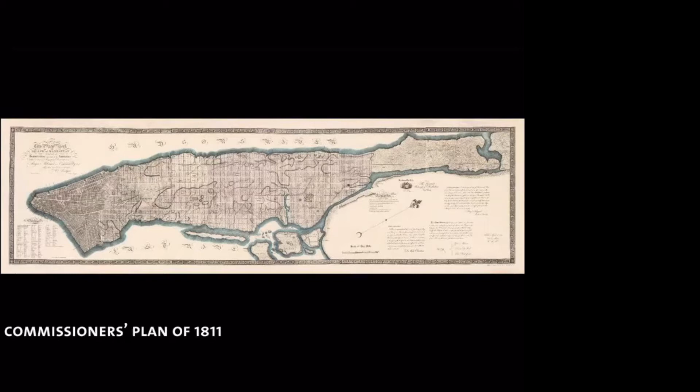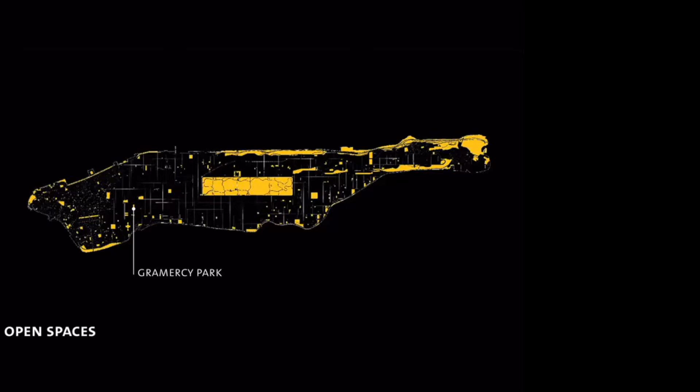Central Park naturally, but also Gramercy Park, not a small and certainly not an insignificant piece of the puzzle. I want to talk a little bit about connections, spaces that connect buildings that look across or relate through open space.

In this next map, the red bits here are connective buildings, sites where the grid of Manhattan was interrupted by an aggregation of buildings. For example, Lincoln Center, Rockefeller Center, the new World Trade Center areas.

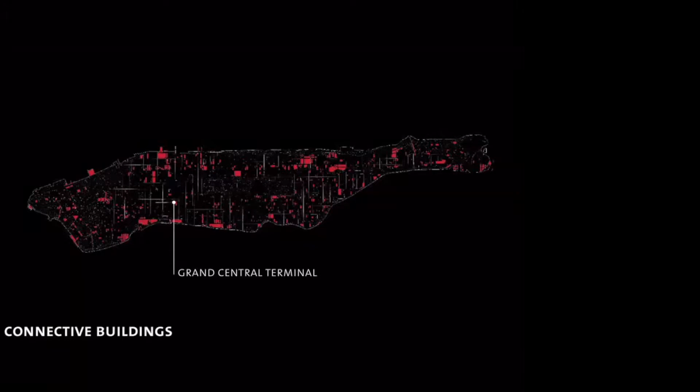These are very important incidents in grid cities, where exceptional moments for the functioning of transport, culture, and education can happen, and they enrich the grid. The Vanderbilt Tower very much relies on and takes advantage of this strategy.

Again, Gramercy Park, by omitting some throughway of Lexington Avenue, by in a way violating the grid, something great happens.

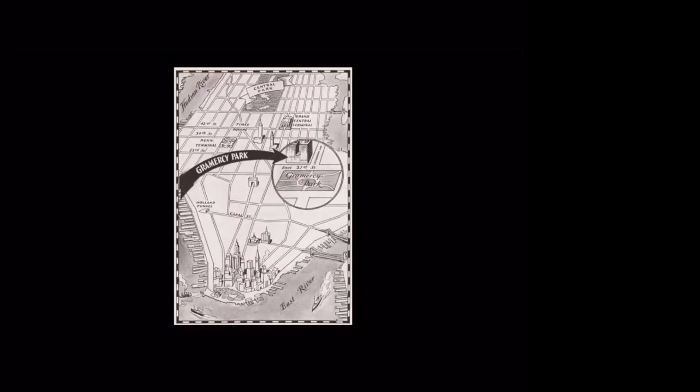The original work of Samuel Ruggles brought this idea of stakeholders from around the park to make a place. Indeed, here's where we all are, or would be if this lecture were not virtual, in the Tilden House, and we see the depiction of crowds.

So changing the grid can give us places for public and private to interplay and relate to each other, and the presence of arts clubs, not just the National Arts Club but the Players Club or Salmagundi Club, fitting for this highlighting moment in the city of Gramercy Park.

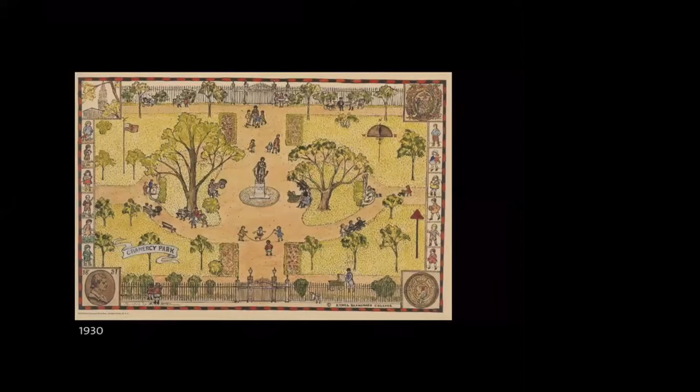A map from 1930 shows the kind of play allowed for, at least for those who had the key, with little children showing up on the side, an almost post-Victorian representation of the park.

Looking now at the map of New York on the left, we see Madison Square, and at that point the dotted rectangle to the northeast of Madison Square was a place where the first rail lines of New York City came into Manhattan, and eventually migrated up to Grand Central, where we know it sits today on 42nd Street.

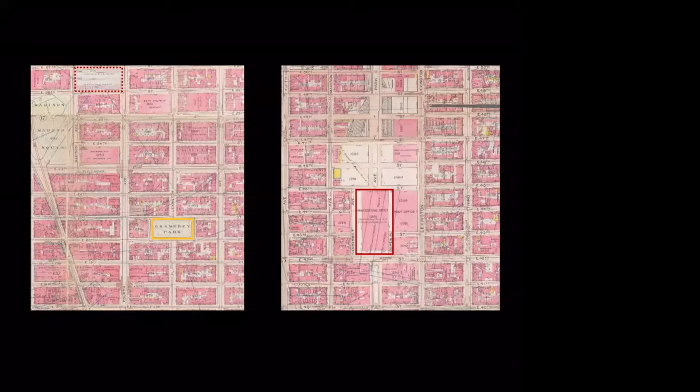So the site of One Vanderbilt, and the first Madison Square adjacent park railway corner, or railway building here, lasted 41 years.

Then came the importance of Grand Central as a place where a number of blocks were appropriated. At this stage of these two buildings, the second one lasting only a little more than 10 years, rail came in above ground. Afterwards, steam engines gave way to electric.

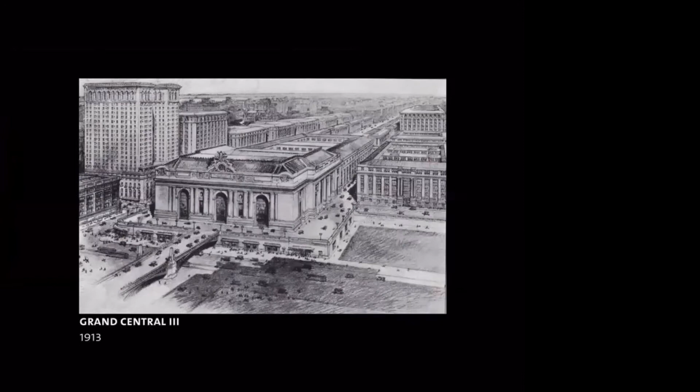They were able to be submerged, and over time this plan was hatched for Terminal City. A lot of it was not accomplished, but the Warren and Wetmore building was built in 1913.

This is really creating the premise for the site and the reason for the building, and its various extroverted features that constitute the One Vanderbilt Tower.

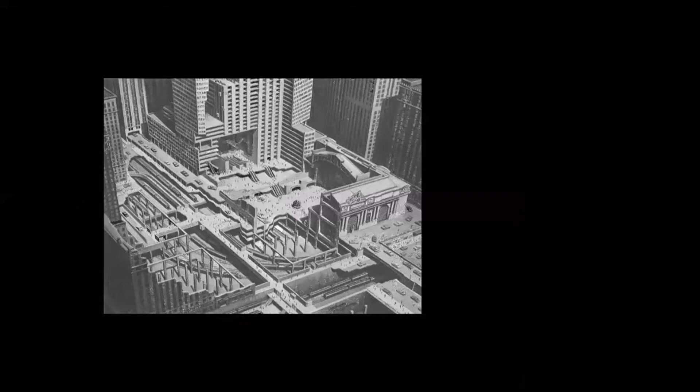Later on, as we look into the way one can dissect Grand Central, we see it as not just an operation to change the plan of this part of New York City. It's also a great sectional feat of bringing interesting vertical terracing and layering into one of the more complex buildings.

Of course, the tracks go underneath, sweeping around. Underneath, you see the curve on the right-hand side being part of the Vanderbilt site.

We think of the almost delirious imagery of Moses King in his depiction of New York as he would imagine it, a place where everything could be connected by bridge, by multi-level walkways, by tunnels, etc.

Some part of this still remains as an ambition which high-rise buildings can try to achieve. The lower Grand Central Terminal certainly did a lot to explore this possibility.

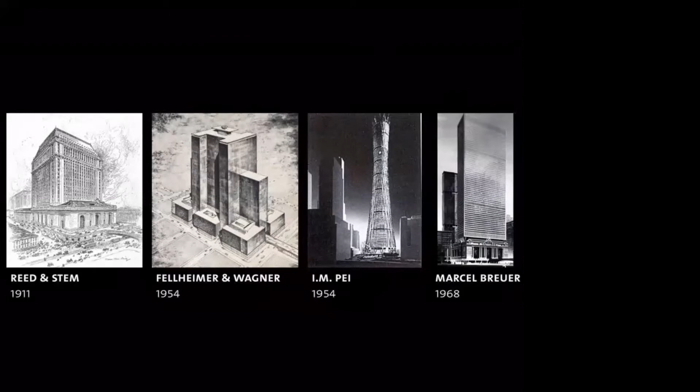After the realization of Grand Central, we've seen a number of ideas about densifying this station district right on top of the station.

Reed and Stem submitted this around 1911, at the same time as Warren and Wetmore's work. It was not taken up, nor were some of the later ideas that came decades afterwards, including very notably I.M. Pei's hyperbolic form of net cables, imagined as a super tall building on top of Grand Central.

The idea always being that density makes sense on top of a station, because the place where we can draw most New Yorkers to come in easily, conveniently, and today with a low carbon footprint, should be the place where we provide the most space for living, working, or culture.

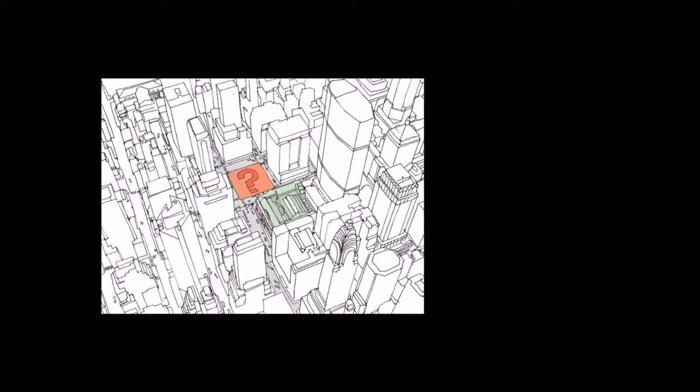But these ideas did not come to pass. So when we came to the site, about 10 years ago now, you see a question mark of an acre of land, which had been assembled by S.L. Green, who are the major landlords of much of this part of Manhattan.

I think the largest commercial owners of property at the time this was started, and close to it at this point. So the combining of a tower with a station again seems right and smart from the point of view of a sustainable approach to density. It's also, in a compositional and pictorial sense, something that reminds us of other combinations of tall and central, like St. Mark's Basilica in Venice and the Campanile, which is not such a functional building, but still a marker of space next to this, in a way the center of town.

Of course, a religious building. Actually, the Campanile fell down, I think sometime before the First World War, for I'm not sure what reason, but was resurrected. Not everybody remembers that or knows it when they go to the site, but anyway, this sort of interesting coming together of a tall building with a central kind of distributor function in the city.

So that kind of combination, that confluence, is something that makes up a very important part of the firm in which I work, Kohn Pedersen Fox, because we have been applying our trade as high-rise architects, but often at the point of multimodal transit centers and mixed-use developments of all sorts of interesting vertical connections.

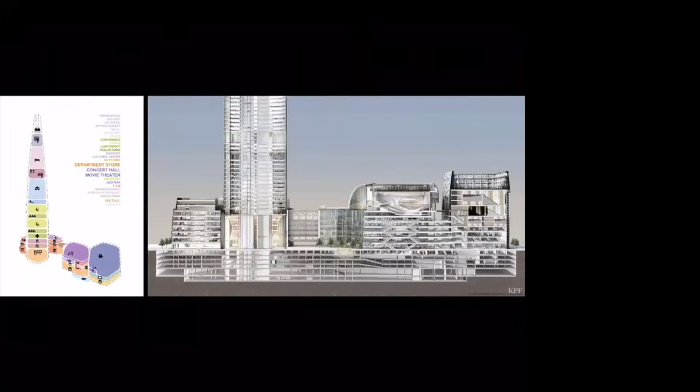So here in Seoul is a 123-story building that I designed some 15 years ago, the Lotte Tower, and you can see here a section that might not be as radical as Grand Central Terminal, but actually has more in the way of interesting functions, including a concert hall for 2,000 people on the 8th floor.

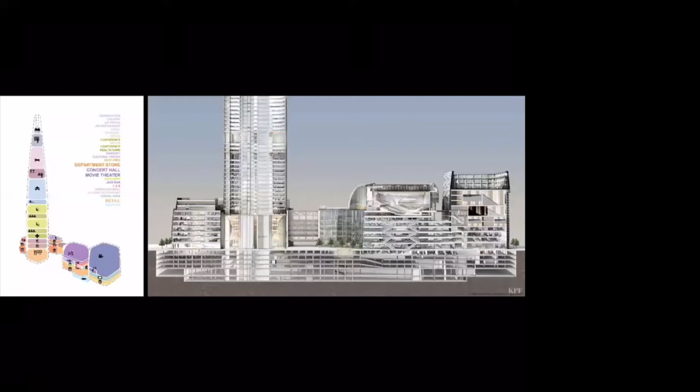But it does bring this technique of vertical mixed use into a place where this collection of building elements becomes an engine of commerce for the city.

Another version, I'll show you a few of these in our work, is also one of my projects, the Jing'an Kerry Center, in a very well-traveled part of Shanghai. And it brings together a composition of office and hotel and residential and retail and conference on top of a transit connection.

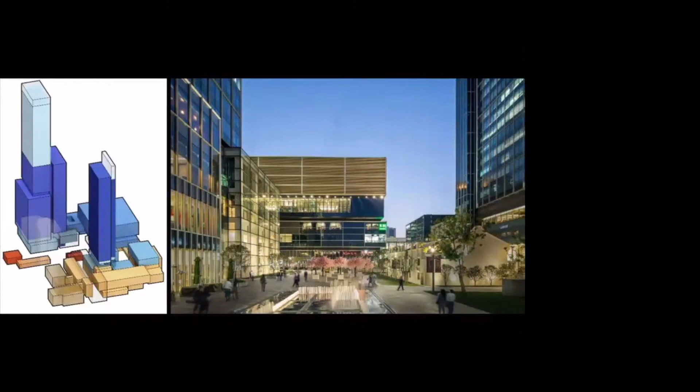And what's most important about it, a little bit like Rockefeller Center, is the public space made inside this collection of uses. And so the high-rise building is very much, as is true of the old RCA building, now the Comcast building, really a place more than it is an object.

And in that place stands a house where Chairman Mao lived as a young man in the early 20s. So there's also cultural significance to the place.

And I think finally in this series, before we come back to Vanderbilt, is a sort of super concatenation of functions in a building which stands above the Shinkansen rail in Nagoya, Japan, a project done for Japan Rail. It's really a city of functions sitting atop the hub of the main backbone of transport of Japan.

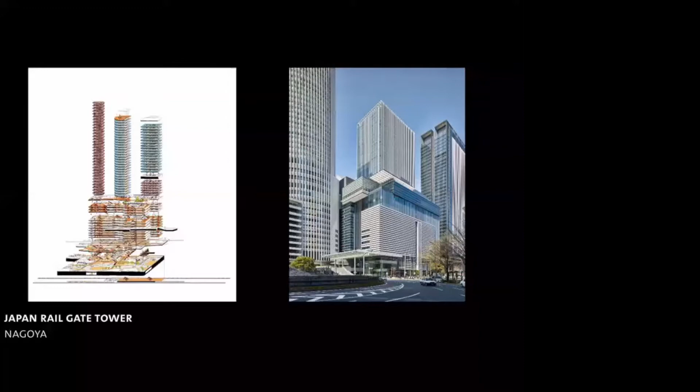So now we come to Vanderbilt, and the premise here is that a building of again high density and great height, we could say, does what it does most importantly at the base.

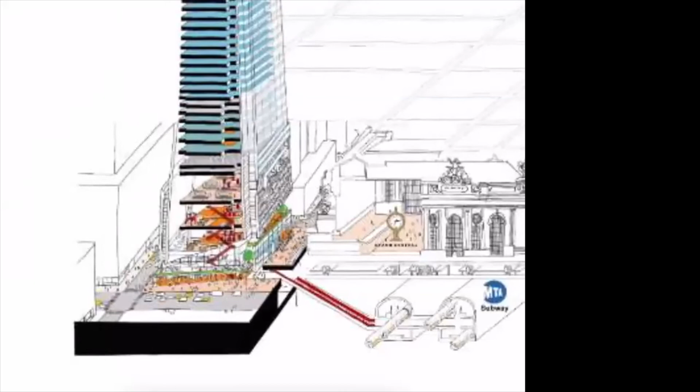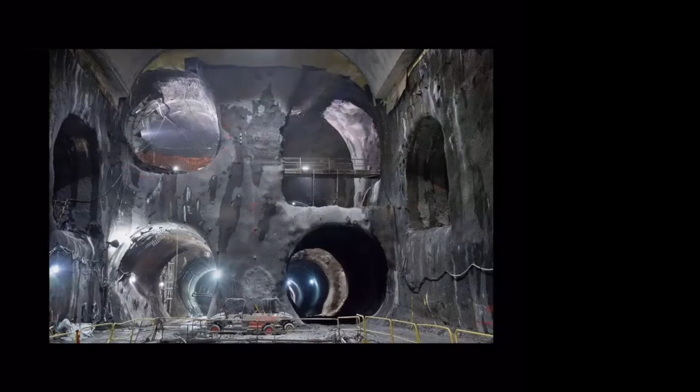I'll just squeeze this to a larger scale, even though the resolution is not so good, but to show you that the idea is that the building would open itself up with a series of escalators, a series of shared spaces, and ultimately connect underground to Grand Central Terminal, doing so going down not only to the main concourse level, where we know the trains that lead to Westchester and Connecticut and the subway lines, but also down to these holes, which were bored probably beginning around 2012, that allow for east side access, which is going to open very soon.

These are now not raw holes that look like tunnel borings, but they're finished subway lines that lead to connect Long Island Railroad to Grand Central for the first time.

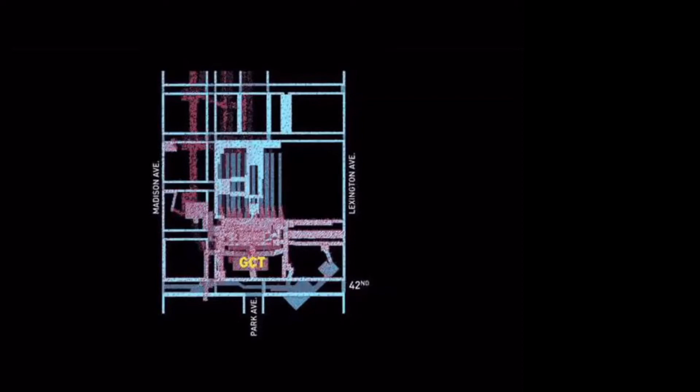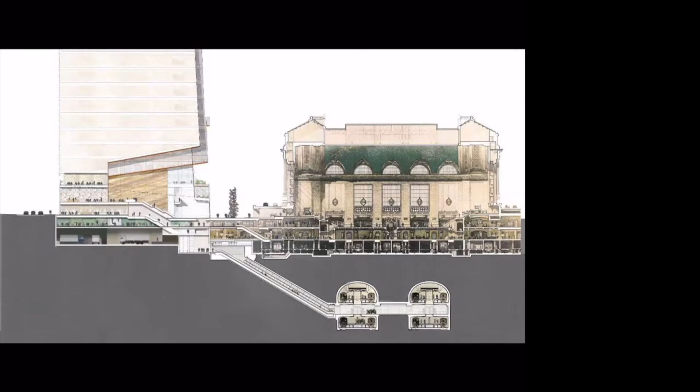The importance of what is happening here is really a great short-circuiting of what otherwise is a longer route for many New Yorkers. It's that escalator that goes way down to East Side Access, relieving a problem that will occur otherwise: the peak load of rail travel when East Side Access opens will double the ridership of the rail part of Grand Central's user group. That would have caused failure on some of the stairs and escalators in terms of how we rate transport use. So in this building, we create a bypass to bring people out of East Side Access and out from the concourse level of Grand Central directly into train halls inside One Vanderbilt, one train hall in particular.

The building also answers an initiative launched by Amanda Burden under Mayor Bloomberg and Edith Hsu-Chen, director of Manhattan Planning, to bring more lively, world-leading businesses to the East Midtown district. A good proportion of buildings in East Midtown were not functioning well, had low ceilings, bad floor-to-floor heights, mechanical systems that didn't deliver proper fresh air, and exterior curtain walls that were not environmentally efficient. So the idea was to spur growth in selected spots by allowing for higher zoning density.

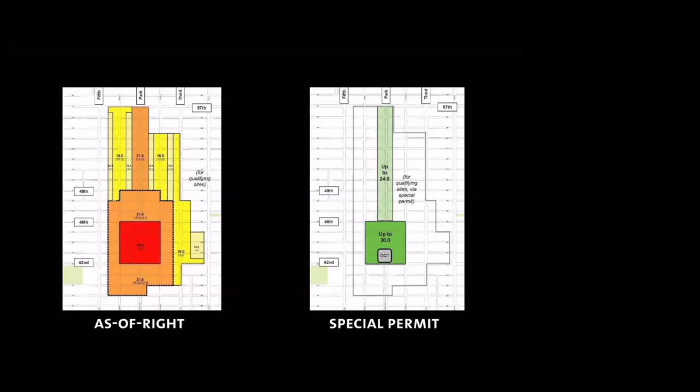The Vanderbilt Tower served as a kind of pilot project, a bit more complicated story—I may not have time to go into so much—but this was the first building in the process of getting the East Midtown zoning approved. So it was very important in really influencing a larger district.

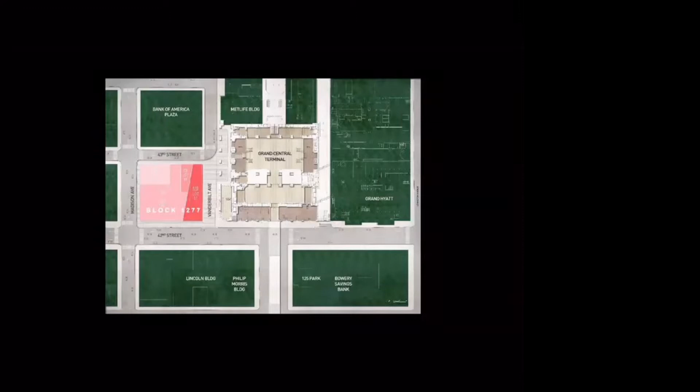Here you see the site, which Marc Holliday, Andrew Mathias, and others at SL Green worked to assemble over about 10 years—1, 2, 3, 4, 5, 6 slivers of land. They then came to us.

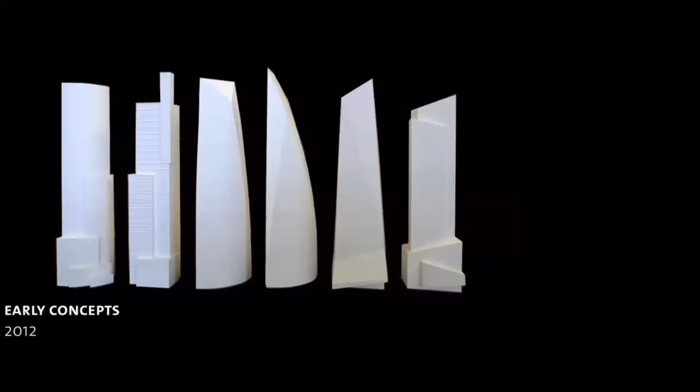The first notice we had about the project was to do a summer of studies of the building. It's our method as an architecture firm to think of building form and solutions in an iterative, explorative fashion, trying a number of ideas before settling on what we think is the most convincing and beneficial way of treating the site. This also allows us to communicate well with the developer, owner, and other stakeholders who can bring intelligence to the process. At this point, the project actually went into a more formal competition mode.

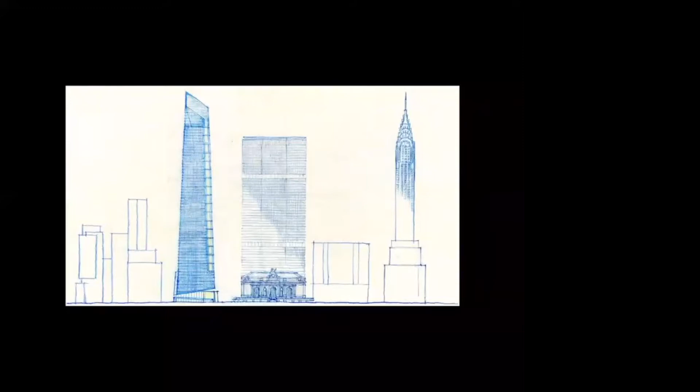A few other architecture firms, colleagues here in New York, competed for the project. We then focused more closely on a couple of solutions: a taper and a setback building. These were my early sketch drawings, showing that the taper had the most power and the most effective strategy to treat the site and deliver office space inside the building, but also a lot having to do with the public realm at the base, afforded by a composition of diagonals.

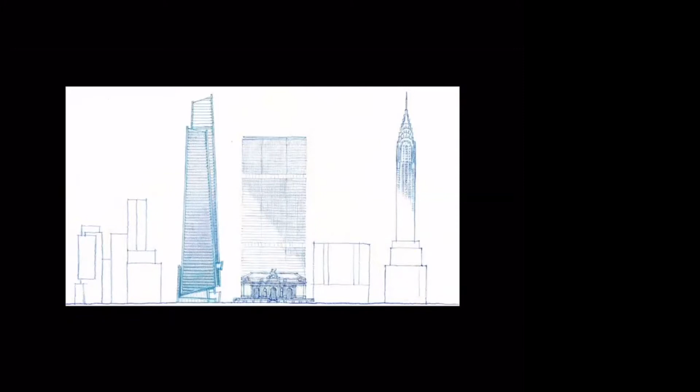That single tapered form gave way in the next sketch to a combination of two nested forms. That went further in these sketches, where I was looking at 1, 2, 3, 4—the reasons for the four having to do both with proportions that become more slender in appearance, but also various structural issues improved by having wind currents treated by indented corners, which confuses, as structural engineers say, the wind forces that could otherwise gang up in a harmonic motion to sway the building.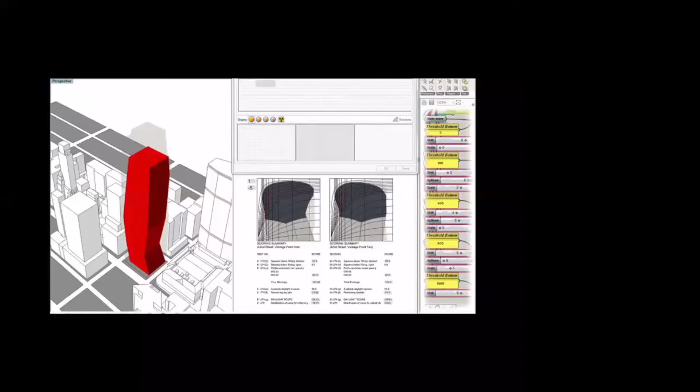You can see KPF's data analysts mapping different structural and planning ideas, which were then analyzed. A little hard to tell from this—I'd have to give another lecture to talk about it. But suffice to say, there's a lot of intelligence in the work our data team does to understand, for example, how indirect light can come to the street. That figured greatly in our discussions with city planning.

The formal composition of the building has these four nested volumes I mentioned, with a kind of spiral relationship with each other. They are not symmetrically disposed along the north, south, east, west axis. They overlap in a way like the petals of a flower or the leaves of a sheaf of a plant stalk. There's something more organic about this composition, which we felt really made sense next to the supersymmetrical, grounded, absolute plan of Grand Central Terminal.

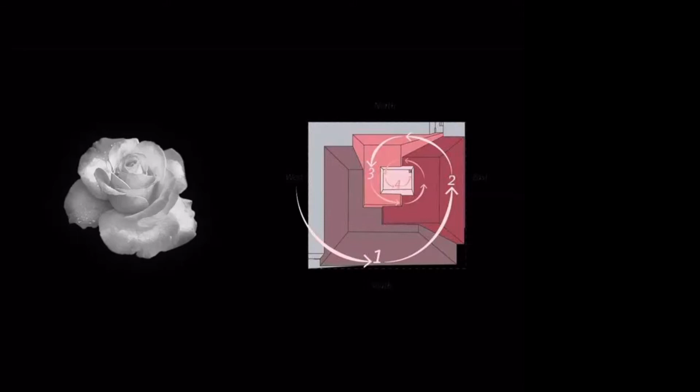Here you can see a little of what I'm talking about in the relationship between the tower, the Campanile and the station, the Basilica below. You see that cut at the bottom of the building, a kind of diagonal inclination of some soffits at the base, expressive spaces one can approach on the street that gesture towards Grand Central. So the closed box of the terminal is complemented or answered with the openness of a kind of lantern-like piece of architecture at the base of the tower.

Thinking about diagonal composition, as architects we pick up a pencil, but we don't think only about what's on our paper and in a void. We're always searching for ideas and sensibilities from other sources—in this case, from the Ocean Park series of paintings by Richard Diebenkorn, or for those who know George Rickey's work, the kinetic needles of stainless steel he brought to many college campuses and public settings. So the beauty of the attenuated form and the diagonal became a theme for the project.

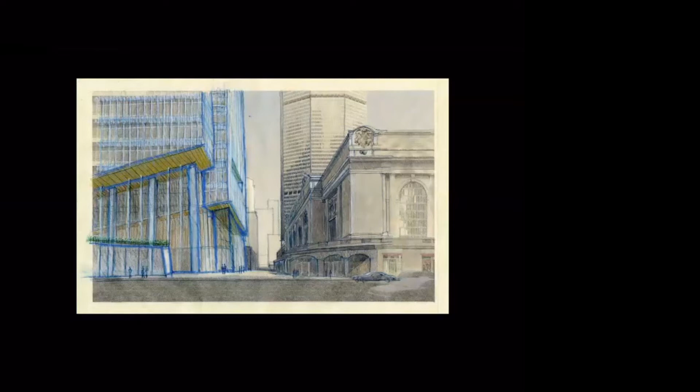It informed that space I mentioned earlier, the uplift of the base pointing towards the terminal building. You see, of course, Pan Am, GE, or MetLife rather, in the background. And eventually there is rising now the Norman Foster building for JP Morgan Chase at the end of this Vanderbilt Avenue. Here, a sort of before and after image.

The inclination, not just in section but a slight pulling back in the plan of the base, allowed us to see from the 42nd Street and Madison Avenue intersection a lot more of the terminal—not just because the building pulls back, but because the glass atrium-like space at the base, made of very low-iron, high-transparency glass, reveals a lot of the Warren and Wetmore building, even past that line. So a part of that building, hidden for over 100 years, is now revealed.

And this was a really important part of, I think, appreciating a landmark and making sense of and celebrating what it has to offer as one of Manhattan's great buildings.

Then another aspect of echoing the surroundings, the sensitivity to neighboring buildings, is the texture of the facade of Vanderbilt. We were determined not to make this a glassy object with little relief. So looking at some of the window compositions and spandrels, other surfaces in the surrounding buildings made of brick, stone, stamped copper, metal, terracotta, we brought into the spandrel of our building, all the way up on the right-hand side, terracotta of diagonals made in upstate New York and Buffalo, and the terracotta we know from Guastavino.

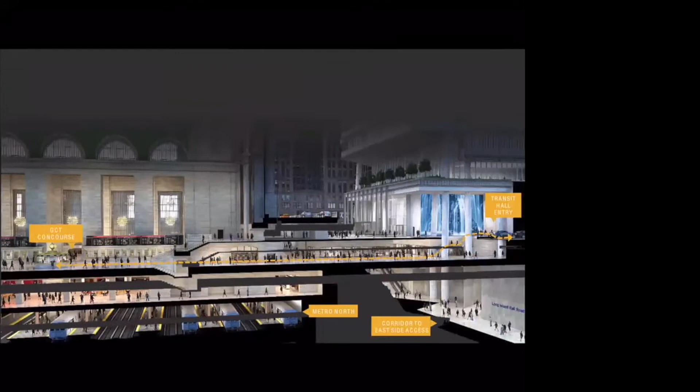Which we find in St. John the Divine and under the 59th Street Bridge, but also here in Grand Central Oyster Bar—the work of this great Catalan inventor, engineer, and manufacturer, producer of tile work, of terracotta. And so the connection made below grade is terribly important for this building; it really makes us view it as a public building rather than just a place of work.

It is a great office building, but maybe even more important is that function of relieving pressure and circulation from Grand Central. On the right-hand side is a train hall, a transit hall, open 24 hours. Though private property, it's really a piece of the public good—as we would think of it, a piece of Grand Central Terminal. It's Grand Central West, I would say.

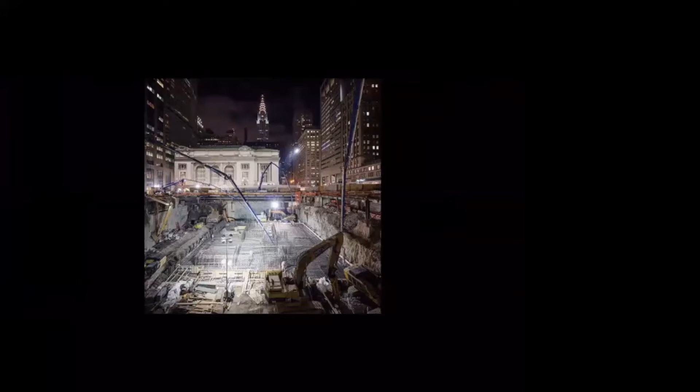This excavation was a major piece of work, I think one of the largest, if not the largest, pour of concrete in the history of Manhattan, given the importance of establishing enough mass to counteract any overturning moments of the building and also to absorb its gravity loads. You could see this tremendous effort of concrete being poured into the cavernous hole below.

Then you see the structure, which Ed DiPaola of Severud, a very gifted engineer, old-fashioned in a way—I don't think he carries a slide rule, but he actually punches a calculator from time to time—a brilliant engineer who looked at the ways the forces of this tall tower could come down, but with a certain amount of cantilevering and leaning columns, could allow for this open space at the base, an open form behind the facades of the terrace to gesture towards Grand Central.

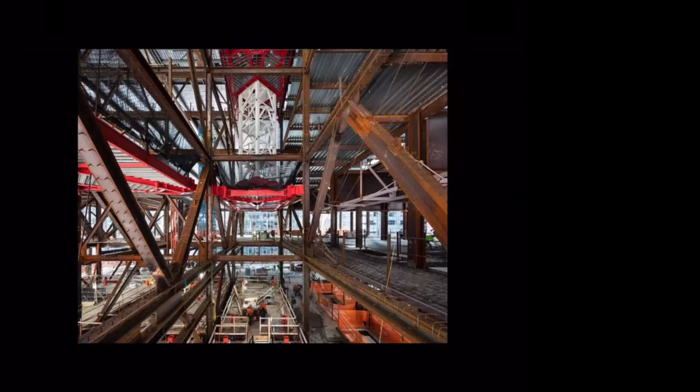As the structure moved up, the steel structure, it was what is known as a steel-first building. That means the concrete core did not become a sort of tree trunk around which, in sequence, the steel was welded and bolted, but rather the steel was the form which allowed this Italian machine, known as a PERI form, to slip-form the concrete.

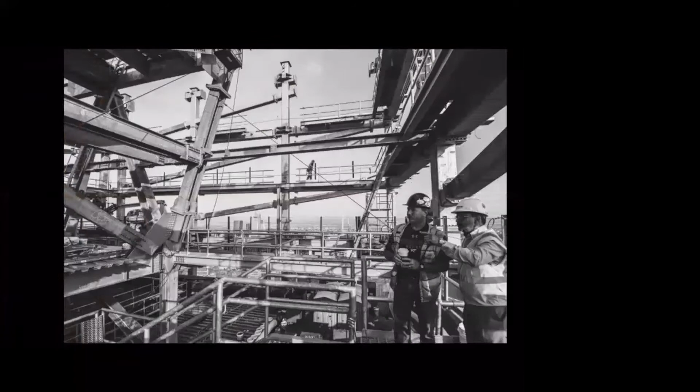So it was a bit innovative, and Tishman, the contractor, did deliver the building during COVID, under budget, and ahead of schedule. It was a remarkably fortunate or skillful effort, or the effort of determined builders, which was really awesome. None of us thought this could happen in the middle of COVID, but it did.

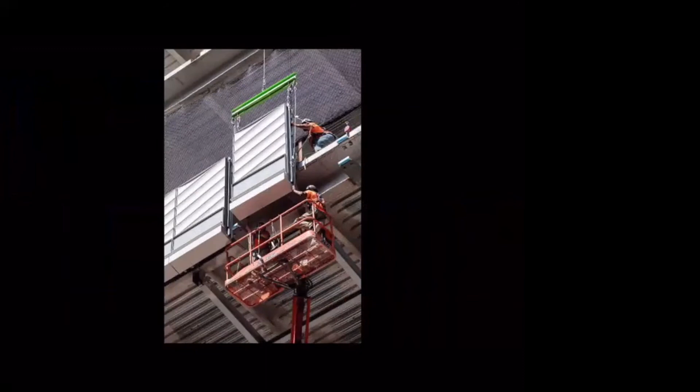So at the topping out, the structure was done, and then the cladding came in the form of these prefabricated panels. Here you see what we call the spandrels, the horizontal piece of the facade that covers the slab, covering the drop ceilings. And terracotta is a very interesting extruded clay material that's fired.

Again, Guastavino did his tile—it wasn't this type of modern extruded form of the material, which has become very sophisticated over time, but also has a beautiful sort of luster to it. For SL Green to put their faith and investment into a material that I would say is noble and beautiful, giving us a sense of the importance of the city we live in, that architecture should give back—that was paid for in the spandrels that went all the way up the building. It could easily have been some pressed metal, but there was a kind of visual, and even more, some other kind of value given to buildings by their materials.

We can see the added richness of a certain amount of finer outrigger filigrees cladding the very base of the building. Next to our neighbors, it was important, we felt, not to be classed with the glass boxes that we find frequently around the city.

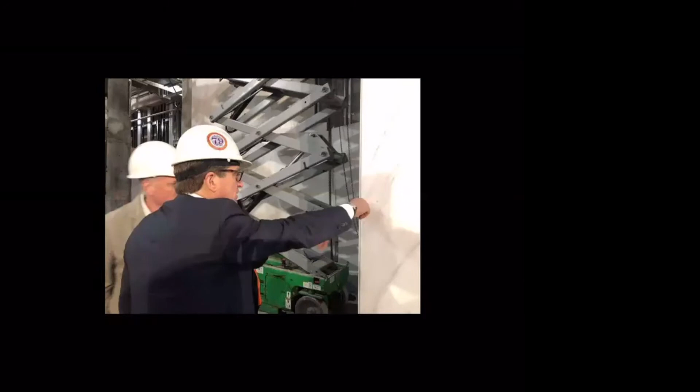This is a piece of art composed, crafted, and detailed by our team of architects. Architects used to be figural artists in the medieval period and the Renaissance, and we don't pretend to be that distinguished, but the possibility to bring your idea as an architect into the detail of the building we thought was really wonderful, executed beautifully by a foundry on the Hudson.

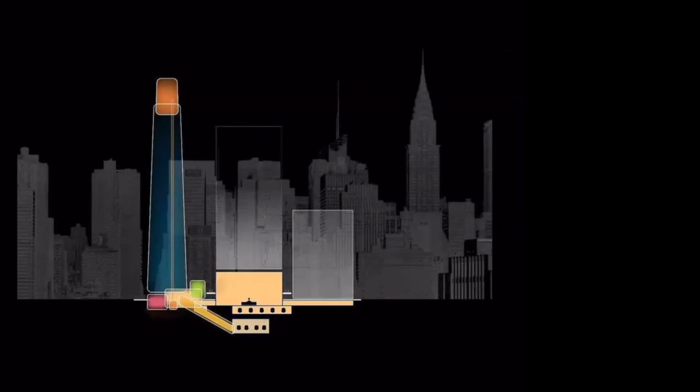At the base, as we come from Grand Central, we might look up and see the fresco of the constellation of the heavens. It's actually backwards, because whoever drew this plan of the skies read it top down when it should have been seen from bottom up. Still, we see Orion's belt, the crab, etc.—a picture of the heavens.

Then we go through the passageway at the level of the information booth, towards what was the Rite Aid, and as one comes to an elevator, it takes one to the top of the building. At the top, one emerges into a double, triple, quadruple height series of spaces that bring a kind of glory of a view of the city to those who either live in New York or visit New York.

This is the design of an artist named Kenzo, who worked closely with Marc Holliday to dream up an idea that the reflections of the sky and the city could come together in this almost infinite way. The tops of our buildings in New York we think of not as private places, not the home for the richest person, but as something that belongs to the public. It's a very important principle in the planning of London, where Peter Rees said the top of London will not be occupied by a 50 million pound apartment.